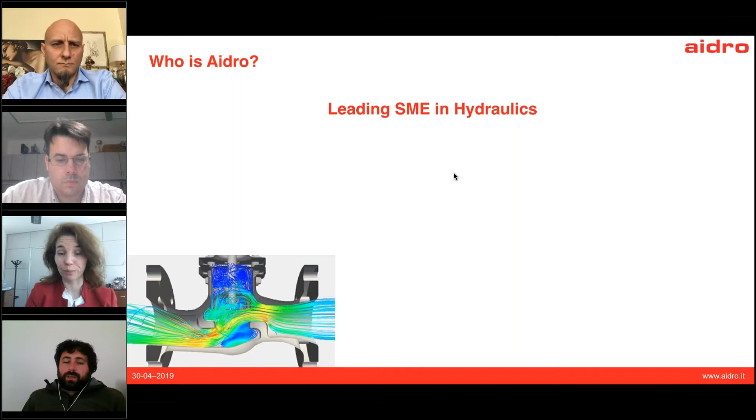Sorry, so again, just a few slides. We are based in Italy. This is our company in the north part of Italy, not far from Milan. And again, who is Aidro? We are a leading company in hydraulics, and hydraulics is the use of fluids under pressure to generate and transmit power. We have more or less 40 years of technical experience, and now we are using additive manufacturing to produce metal parts, using the laser powder bed technology.

A very short overview of our core activities. We do engineering and design for our customers, custom-made solutions, the production and metal 3D printing. We do this in-house with our 3D metal printer. We do the testing and machining of our parts. And because we are a small company, we are well known to be very fast, with fast delivery and quick replies to our customers.

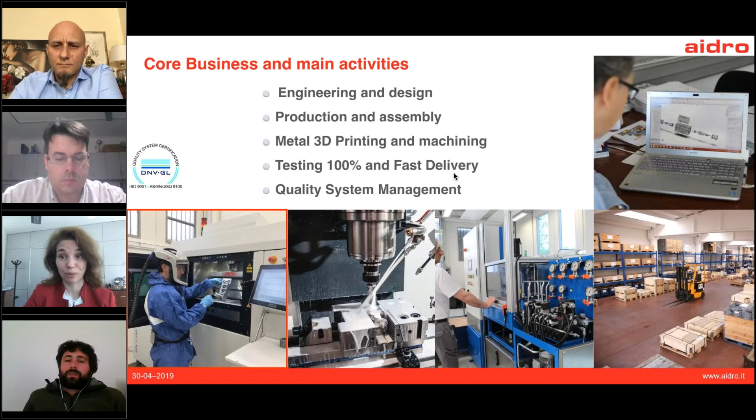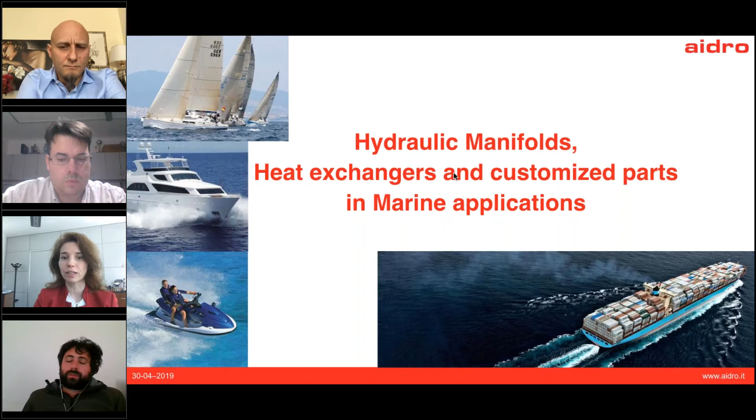Now about hydraulics components in marine and maritime applications. As I told you, hydraulics has very wide applications. For example, in sailing, we have a lot of propellers that can use hydraulic power. In yachts, we have other hydraulics components, and also in jet skis we have, for example, the exhaust manifolds. And in vessels, of course, there is a lot of need for power to move the systems, so we have hydraulic systems inside the vessels.

And now, what about our typical application of additive manufacturing? As I told you, we chose this technology a few years ago because we have very high pressure inside our products, so we need very high density. That's why we decided on metal additive manufacturing, specifically laser powder bed fusion technology. We use different materials depending on the application: stainless steel, titanium, Inconel, or aluminum.

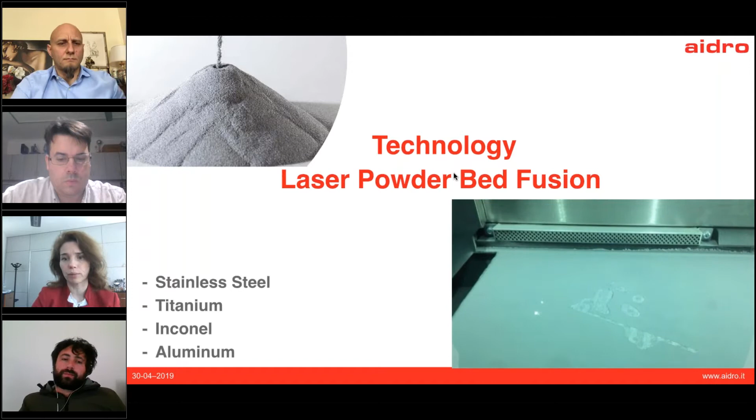But what is really important to say is that additive manufacturing completely changed our minds and our approach to design. We found in additive manufacturing a very high power to solve problems and to have new solutions that were impossible before.

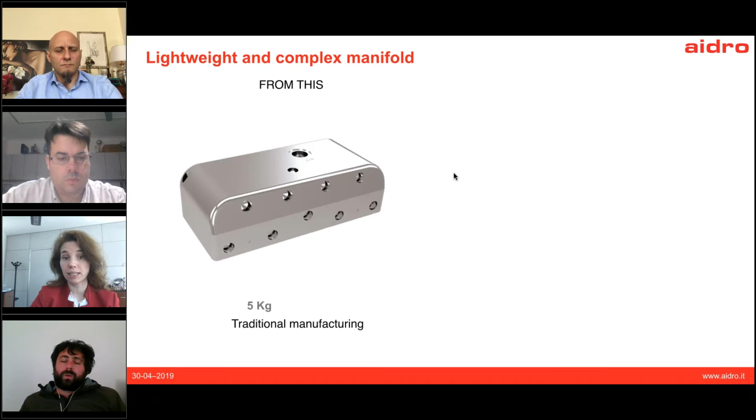Now I want to show you one of our best examples of manifolds. This is a very lightweight and complex manifold. Here is the traditional manifold made from a metal bar, made in aluminum, with a weight of 5 kilos, traditionally made with CNC machining. We redesigned it to have a very light solution and arrived at this manifold that is only 1.3 kilos, so we have a 75% weight reduction. This is really impressive, and it's really important for applications where we need to save weight for lower energy consumption, also for example in sailing or other mobile applications.

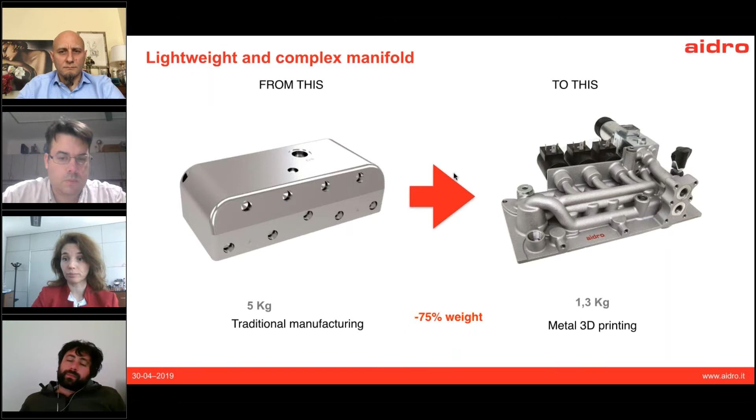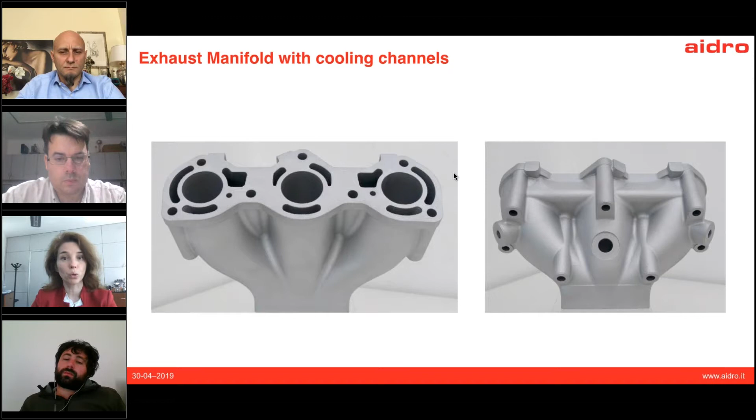This is another example of the advantage of using additive manufacturing in manifolds. This is an exhaust manifold with a cooling channel inside. We have integrated two functions into one, making one unique solution that solves the problem of having cooling inside the manifold.

We have many advantages in additive manufacturing specialized for hydraulics applications. As I told you, we can achieve very complex shapes in a very easy way without higher cost, and our shapes can fit in the available space. We can make custom-made manifolds, for example fitting in the small space inside a boat. We have very light solutions when weight is important, and we can combine multiple parts into one, simplifying the assembly of hydraulic systems and integrating more functions into one. This is the example of the cooling channel inside the manifold.

Of course, this technology is perfect for customized solutions. In many cases where standard production is not suitable, with additive manufacturing we can arrive at the best solution, best product for the application in a very fast way, not only for prototypes but also for spare parts. For the marine and maritime sector, we see a very big interest in spare parts, especially for old vessels, because a lot of spare parts no longer exist. With additive manufacturing, we can reproduce a one-to-one copy of the old parts in a very short lead time.

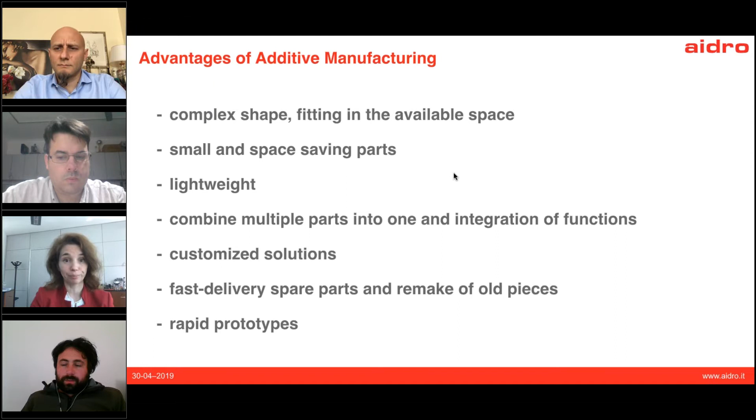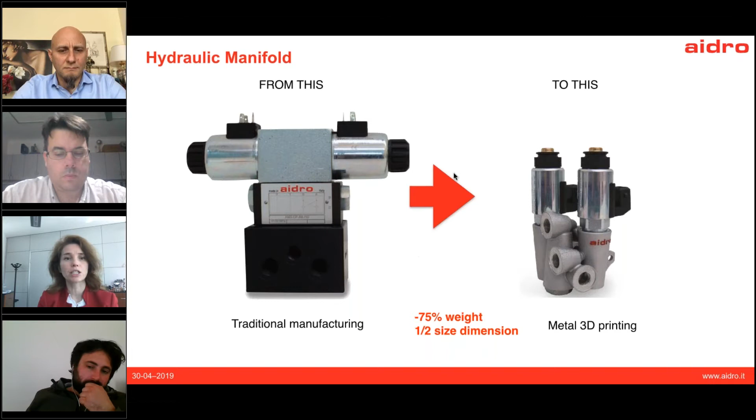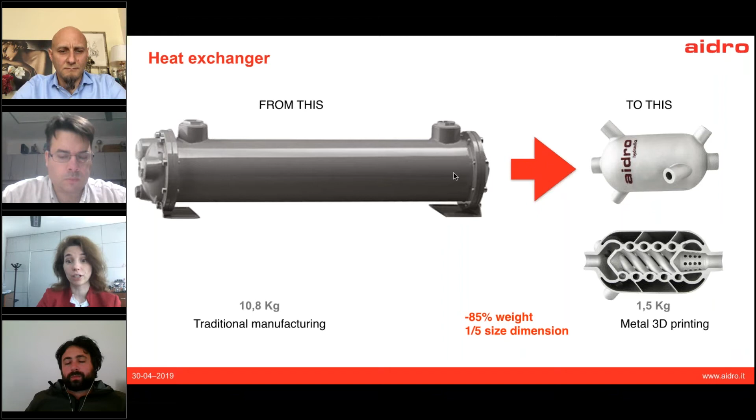Now another example, this is a heat exchanger, special for big vessels that have a lot of heat exchangers, for water, oil, for example. Instead of the traditional one on your left, more or less 11 kilos, we can have the same function in only 1.5 kilos. So it's an 85% weight reduction and a very small size.

How do we do everything? We have our internal department from design to 3D printing, because to develop the best design and the best 3D printed product, we keep our activities inside. The biggest part is the design, because as I told you at the beginning, we have a new approach to design—it's completely free compared to the traditional way. Now we are able to imagine innovative solutions that were not possible before. We use laser powder bed fusion technology, and we have our machines inside.

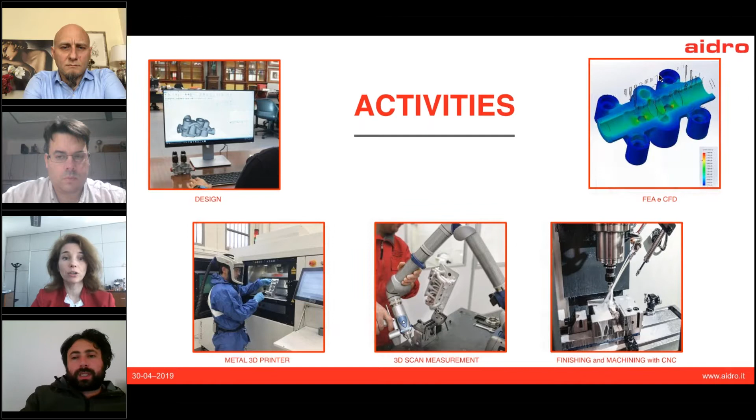And of course, we do all the other activities like machining, controlling the shapes, making measurements, and all the tests, because it's really important to have the process under control, especially for applications like maritime and oil and gas. So we test the powder, the raw material, the printing, and the mechanical properties.

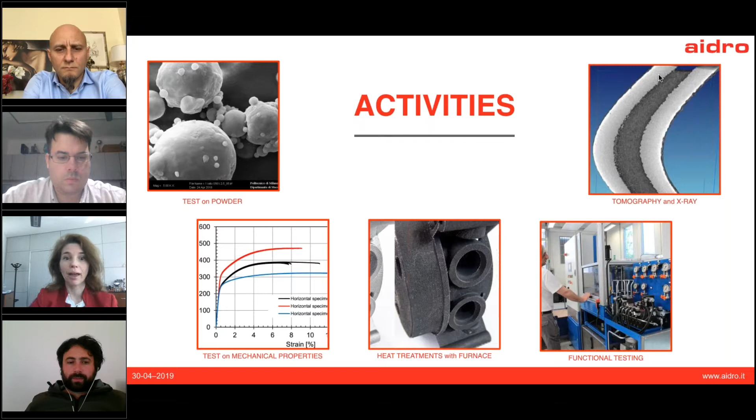And the best part, as I told you, we have a lot of new ideas now to solve situations that seemed impossible before. We now have open-minded people on our team who can come up with new ideas. We are more flexible, have a lot of creativity, and are able to face new challenges. Thanks to additive manufacturing, we can now see possible solutions to a lot of different situations. So thank you very much for your attention, and I'm here ready to answer your questions.

Thank you very much for that, Valeria. Really fantastic, I really had no idea it was that significant a weight reduction on some parts. So with Valeria, we discussed how small intricate parts for large systems can really affect large systems.

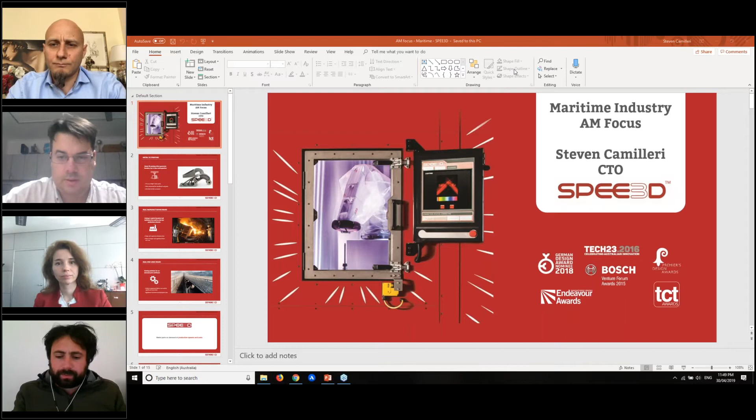Great, thank you. Can you hear me okay? I can hear you fine, yes. And now I'm going to turn the controls over, so you are now the presenter and you should be able to share your screen. Okay, just a second. All right, is it working? Yeah, yes, it is, yes.

Great, all right, well, hi everyone. Thanks for coming to have a listen to our presentation. So, as David mentioned, I'm the CTO of SPEE3D. We're an Australian startup company working in a new kind of metal printing technology.

So a bit of background. Everyone knows technologies like SLM, fantastic ability to make parts, incredible geometric freedom, but you have to pay the penalty in terms of cost and time. So these kinds of parts tend to focus on very high value parts. So we've come into the industry trying to change this paradigm and get away from your traditional medical, dental, aerospace focus.

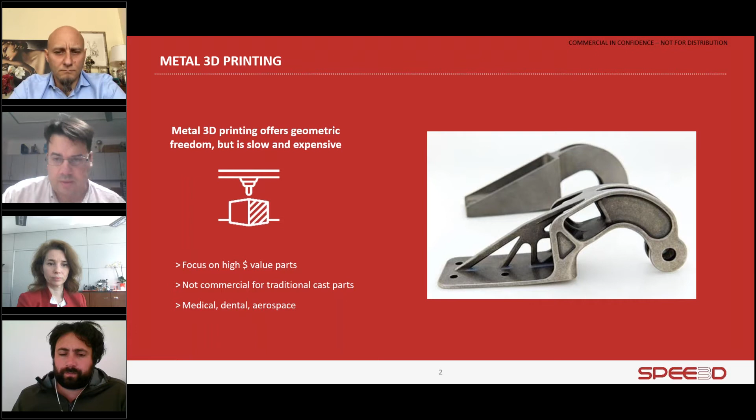So the kind of industry we want to compete in is the casting industry. Casting is the way that you make metal parts cheaply. It's been around for about 5,000 years. It takes a lot of infrastructure, equipment and tooling to make casting work. You typically need to do casting in large batches, it's not cost effective in small batches, and it's very difficult to manage that process. So we want to try to make the same kind of parts that casting can make, rather than the same kind of parts that SLM can make.

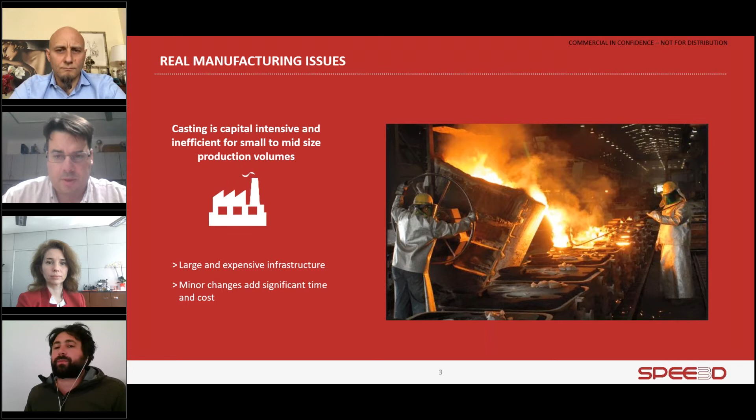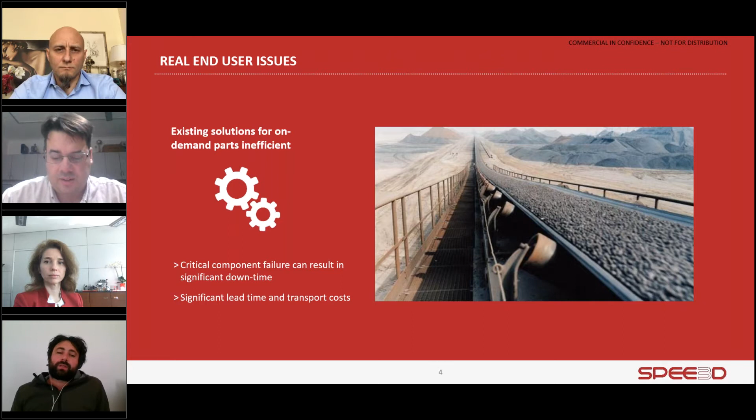So we're targeting real end users, the idea that people might be able to avoid downtime using 3D printing technology, either printed on site or very close by. We're currently involved in a range of very interesting remote projects where we're looking at printing parts on demand. The picture here you can see is an iron ore mine in Australia. That conveyor belt goes for 300 kilometers, so you can imagine it doesn't take much for that to go bad, and it's quite difficult to get it to go well again.

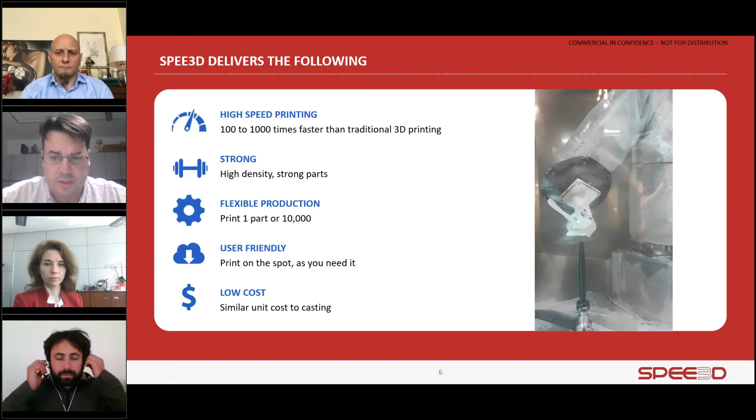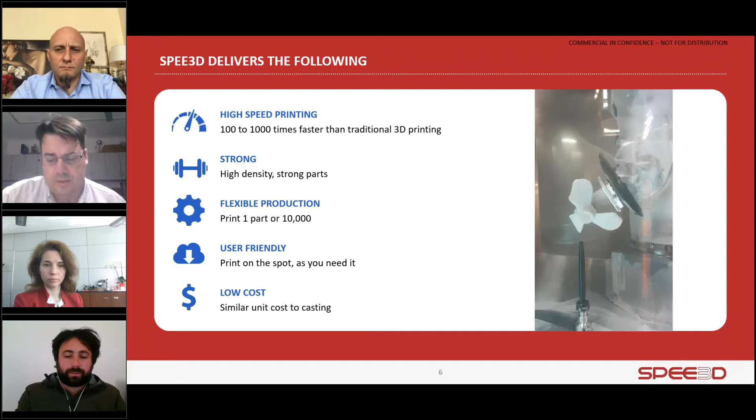So we're here to make metal parts on demand at production speed and cost. That's our vision. So I have a little video here of our process, you can see it manufacturing a propeller on the right, this is real time. Compared to SLM, our printing process is about 100 to 1,000 times faster. We make very good quality, high density metal. We put a lot of work into our materials development, and that's really what we're delivering, good material. And the process is quite cheap, quite flexible in a range of volumes. It allows you to print on demand, it's very easy to access, and it's very low cost.

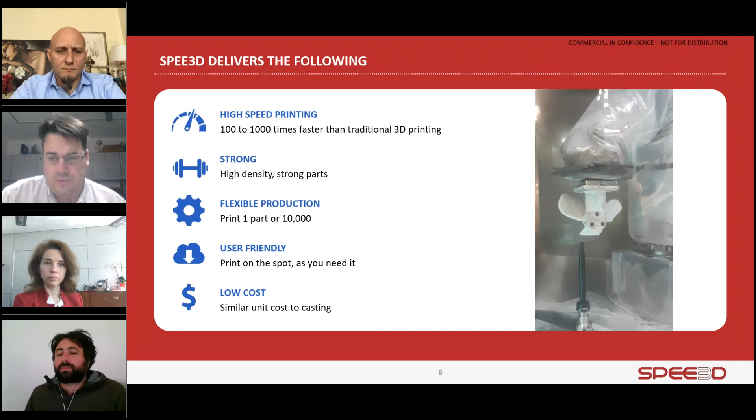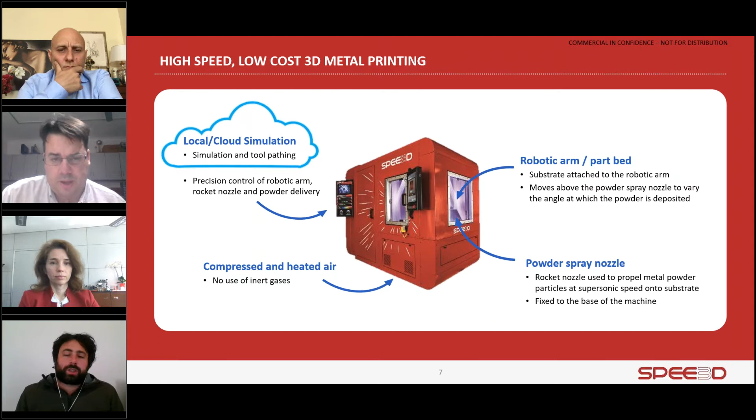This is our LightSPEE3D machine. You can see a robot arm which holds the part as it's built, with a spray nozzle pointing upward that the robot arm hovers over. You bring in your geometry through our cloud process into the machine and load the powder. The process uses a cold spray of compressed air at about 1 kilometer a second to smash the metal powder into the part and build it up, all done without melting.

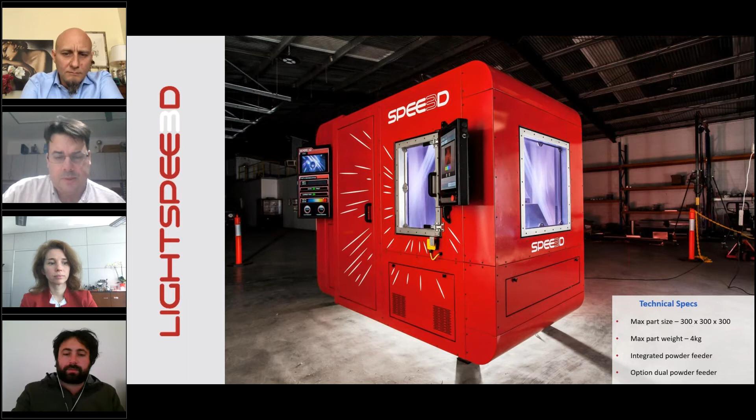This is our Lightspeed machine, our small machine, which does parts up to about 4 kilograms. And this is our newly launched product, Warp Speed, which will do parts up to 40 kilograms. This is starting to be a normal kind of size for the maritime industry.

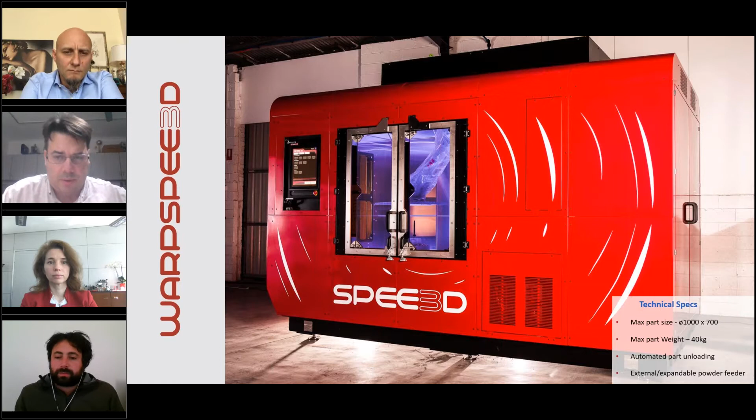There's a range of interesting materials we can do. Copper and aluminium are our traditional materials, and we do very well with those. Pure copper is our electrical and thermal material that has very high performance in that market segment. Aluminium 6061 is our favorite alloy, used for mechanical problems - whenever there's a need for light parts that are very strong, aluminium is perfect. 6061 is a particularly good alloy for marine use, as it's very corrosion resistant.

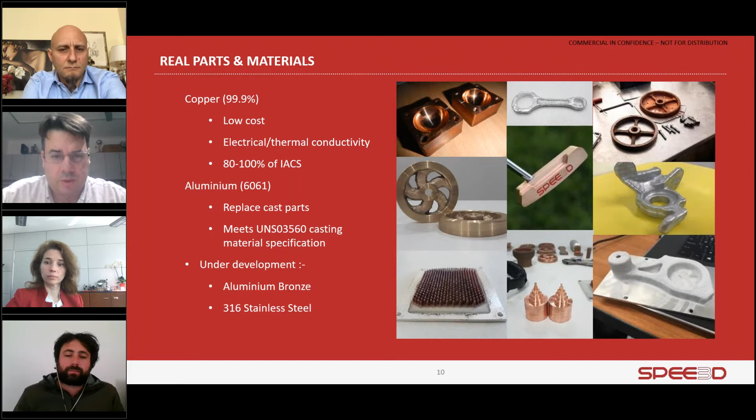Now we have two other materials we've been developing for some time, getting close to being complete: aluminium bronze and 316 stainless steel. The wheel you can see in the center of the screen is done in aluminium bronze, that lovely gold color.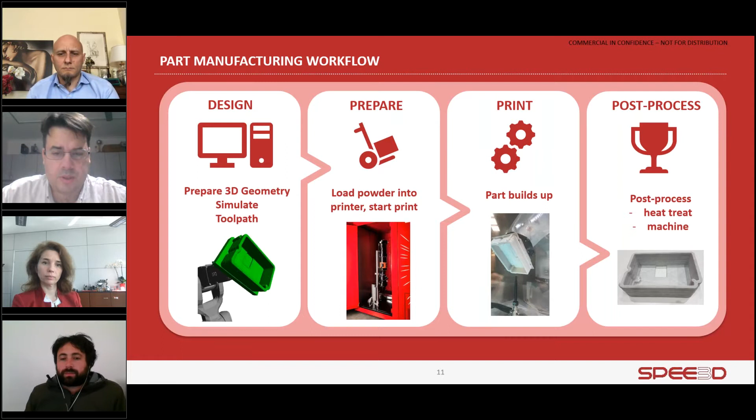We worked with Charles Darwin University here in Darwin, Australia on this project. It was a collaborative venture and went extremely well. For the proposed solution, firstly, we wanted to establish a compliance framework.

This is something that's starting to become very common in 3D printing - the idea that you need to find out how to make that part acceptable to use once you've completed it. You can't just print it and prove that it's good; you've got to generate the necessary paperwork to make sure that part's acceptable to use in the real world. In this case, there's a military standard those parts are made to, and that made it very clear what we had to do to make that part comply.

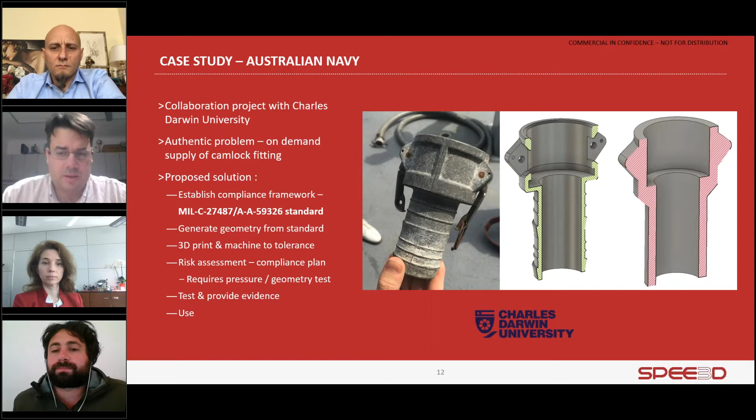On the right you can see two examples of the part generated from the standard. On the left, with the yellow-green cross-section, is the part as it's completed and machined. On the right, the red part is the 3D printed blank, something like a cast blank with machining allowances, giving us the ability to machine it to precise tolerance.

So one of the advantages of our process is it's quite predictable, and this means we don't need to do so much trial and error as might happen with other 3D printing technologies.

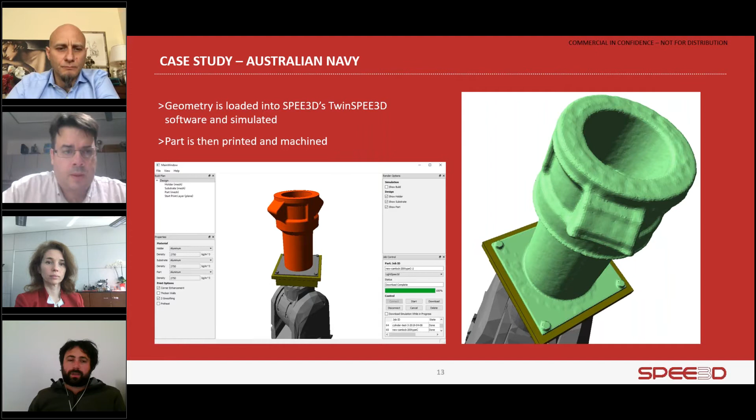So the printing cost we estimate to be about $100 if you were to just print one — that's a case where the printer is lightly utilized. However, if you're able to utilize it more regularly with a series production style arrangement, then typically you're making parts like that, about a 300 gram part, for about $20 US.

The estimated printing time is about an hour for the one-off. That's in a mode where the printer guarantees what it will do. But for production, where you're allowed to cut some corners and optimize some things, you can get that down to 10 minutes. So it's a very rapid way to solve the problem.

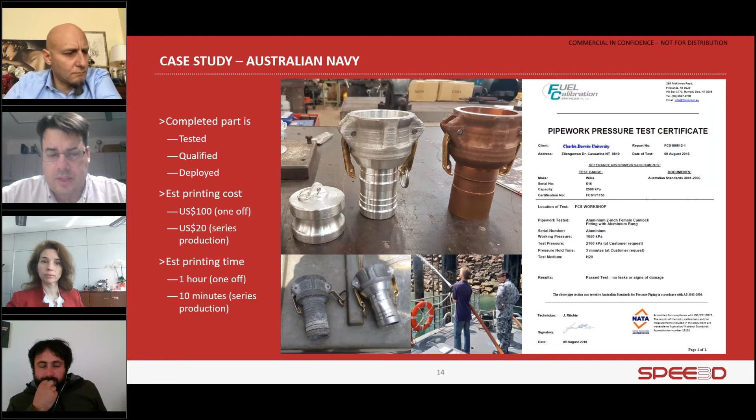Thank you very much for that, Steve. That was definitely very interesting and totally, very much separate from what we discussed with Valeria. So we talked with you and Valeria about two different metal technologies.

Let me just do that. Yeah. Okay, so you are the presenter now. So we see your screen, so you can share your presentation whenever. Wait a minute, you can see my screen just now? Yes, I see. Okay, a minute to put full screen.

Hi to all, thank you for listening to me. I'm Francesco Belvisi, and to me it was also very interesting listening about metal 3D printing, but our focus is on plastic parts. We are a small company, a startup from Italy, from South Italy, and we use also robotics, and we print parts with carbon fiber filled plastic, usually polyamide.

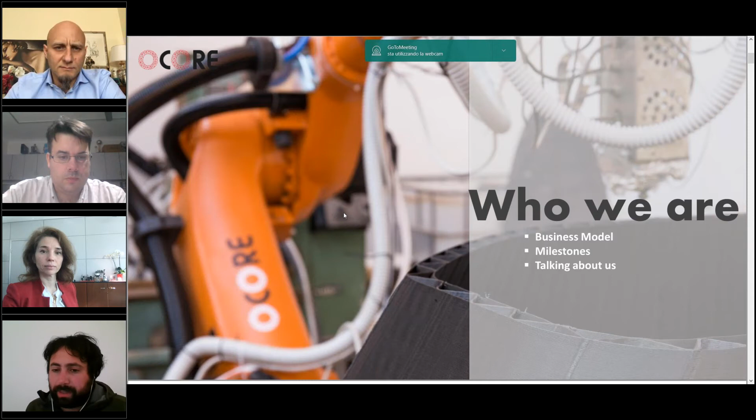Just to give you a general scenario of our company: we have lots of technical partnerships, working with companies for developing hardware and software, a material company, and a certification and testing company. We provide service for printing semi-finished products for our clients in manufacturing companies, shipyards, or companies that work in the field of composites.

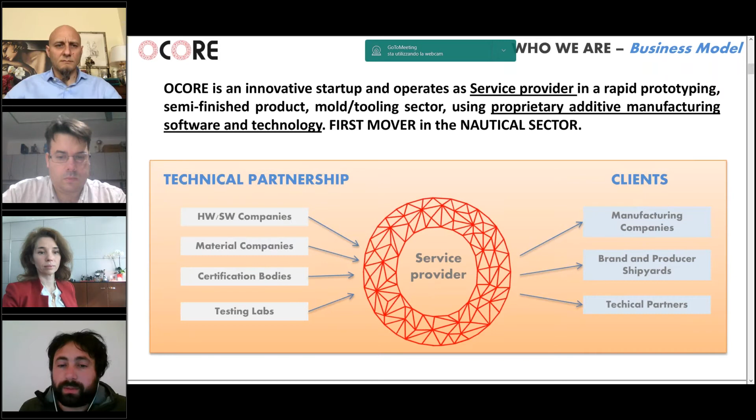Just to tell you a very short story about us: we started with research on complex and optimized structures for sandwich core geometry. We had an initial partnership with CRP Group, a company expert in SLS technology with a very stiff polyamide carbon reinforced solution. We did many tests coupling this material with conventional continuous long fiber composite and textile. In the second period, we decided to start developing some components for boats.

With time we approached making bigger parts, so we did some tests with BAAM company.

Sorry, I heard some echo. I'm sorry, I can hear you fine, but maybe I should mute my microphone. Yeah, exactly, thank you, let me just do that.

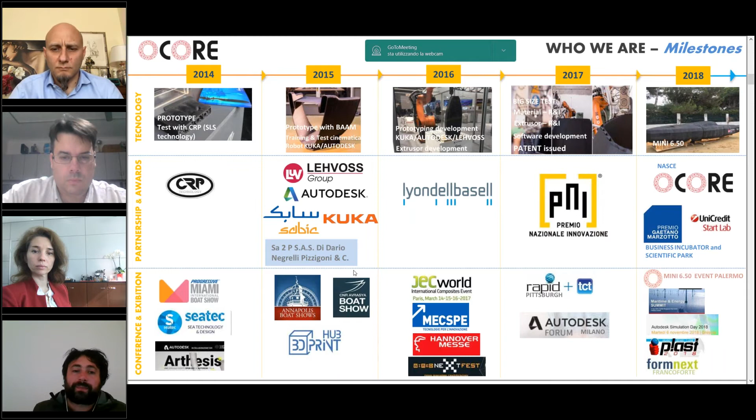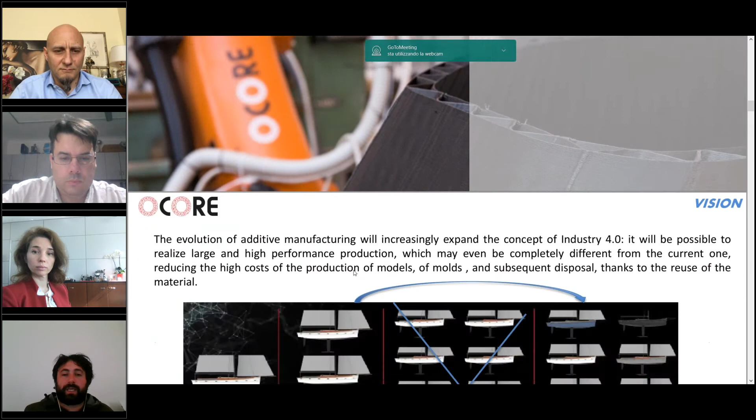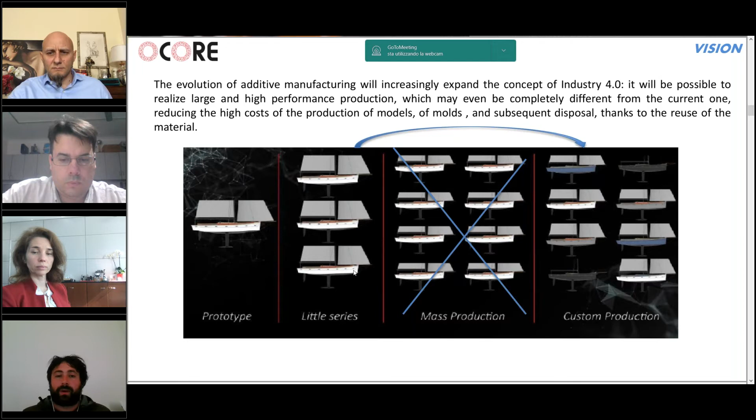So lots of companies talk about this solution, but what about our vision and mission? We started from our background as yacht designers and builders, and this is a field that doesn't have lots of automation in production. It's generally very expensive, making prototypes and custom-made units. So in our approach, this instrument has great potential, also from an ecological point of view.

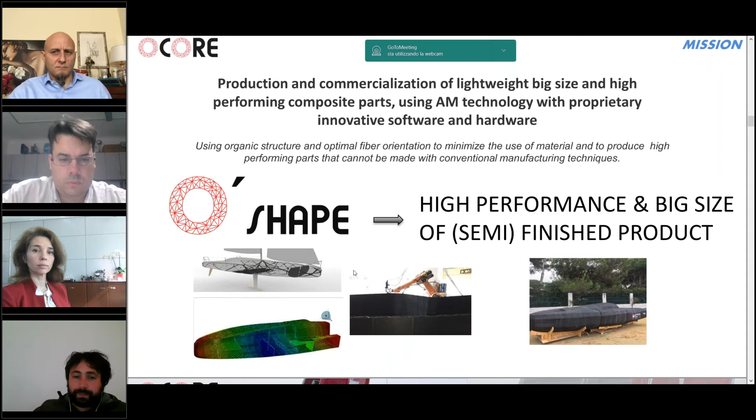For the first time, we are using thermoplastic material that can be reused on medium or big size units. Another element of our approach is that we can manage new kinds of shapes optimized by topological optimization. Usually you cannot use this kind of structure and structural layout in big size components, because they are very complex to produce with conventional production systems.

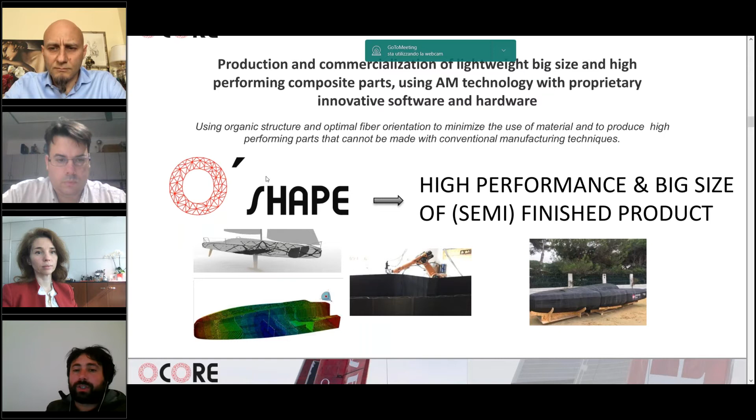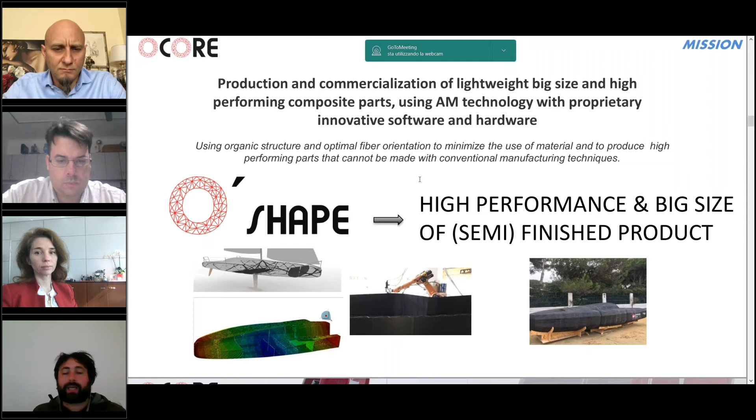So one product of our solution is called O-Shape, our approach to manufacturing the hull, and the other kind of product we call O-Molds, which is the way we can also produce some molds for parts of the boat.

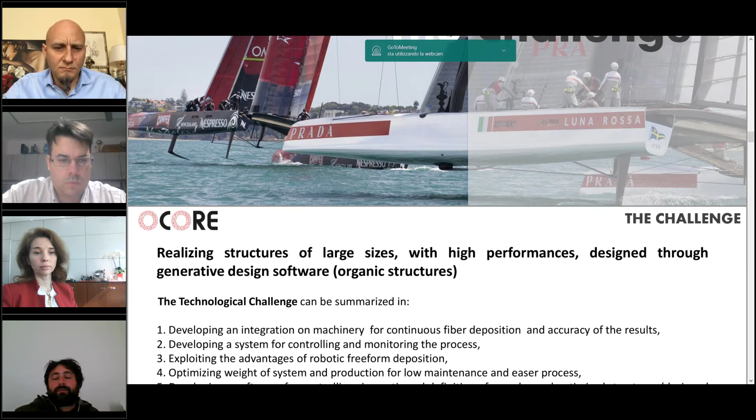Regarding the technical challenges of our system, we are always in a developing process. In our future approach we will integrate continuous fiber placement, because currently we only print composite with short fiber, and we do a second step with composite lamination over the 3D printed structure.

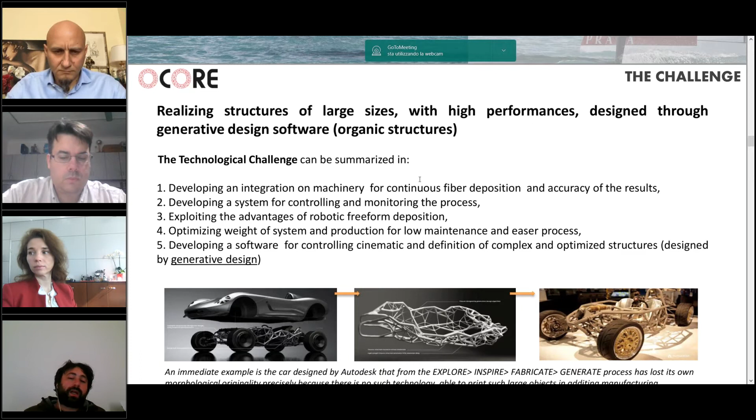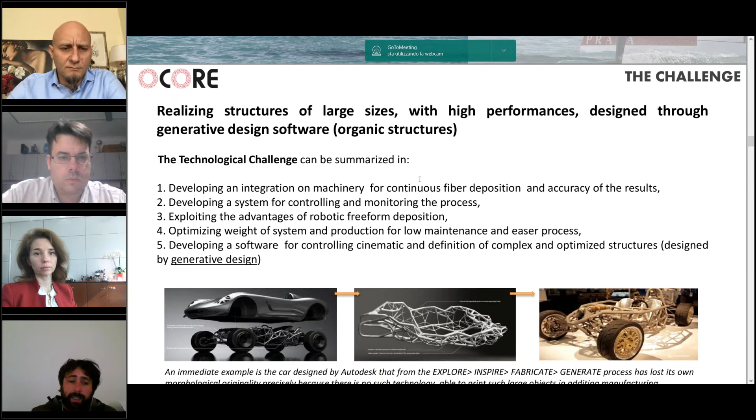We are always pushing and developing the freedom of printing, because we don't print only in longitudinal and parallel layers, but with our 3D printing system we control the anisotropy of the printer, so we can print following the preferential direction of the load. We've also always worked from the design point of view to integrate multiple functions and elements inside the designed part.

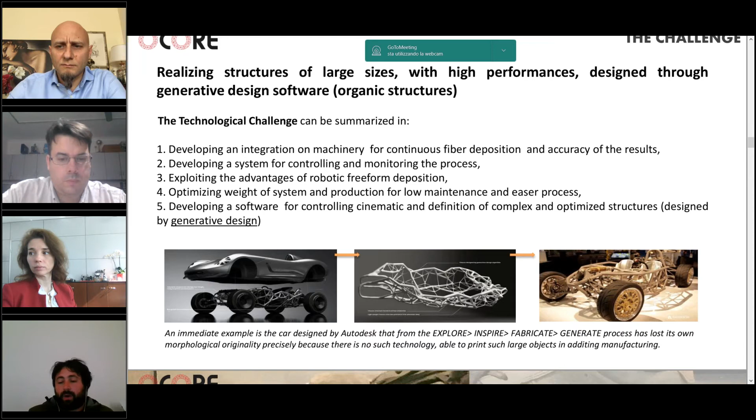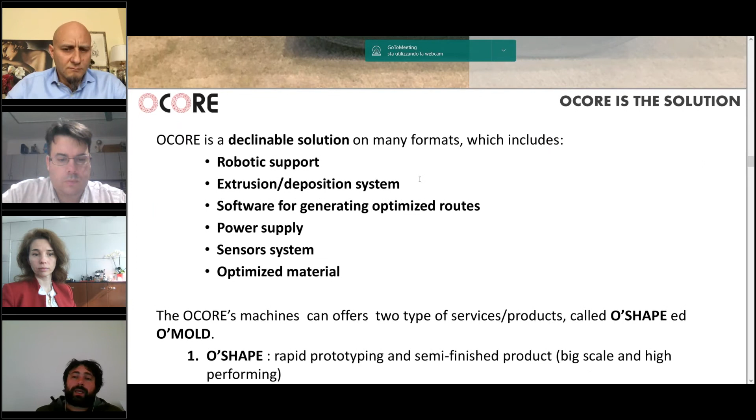Regarding our solution, just to help you understand better: we have a robotic support and an extrusion system that has lots of control and integration to manage the process.

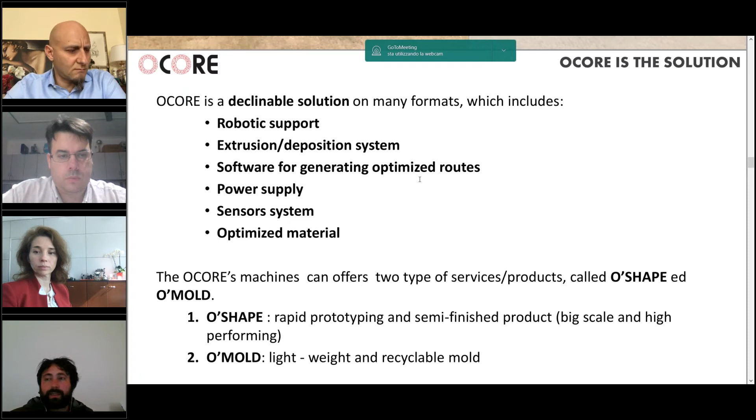We worked so much on the software to have exact calibration and control of the dimension and speed of the robot, so we directly control the robotic system. One very important part is monitoring the process, because it's crucial for controlling too high or too low temperature levels that can melt the part or cause poor adhesion between layers. We also have a range of materials for different solutions and applications.

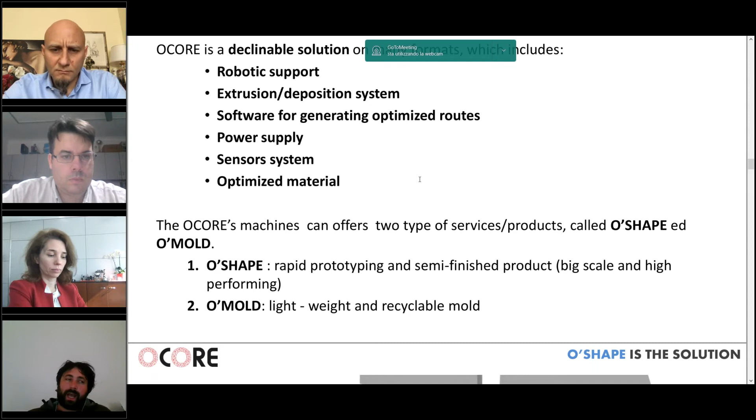In the case of the boat, we developed together with Lehvoss a kind of plastic that is very stiff and resistant to marine environments, and we did a lot of tests for aging and water absorption.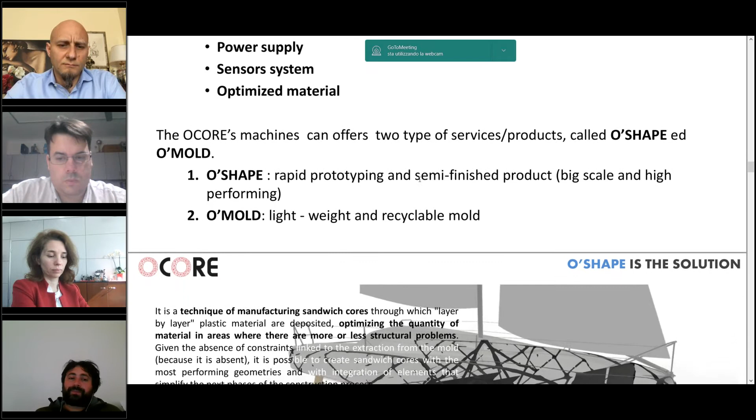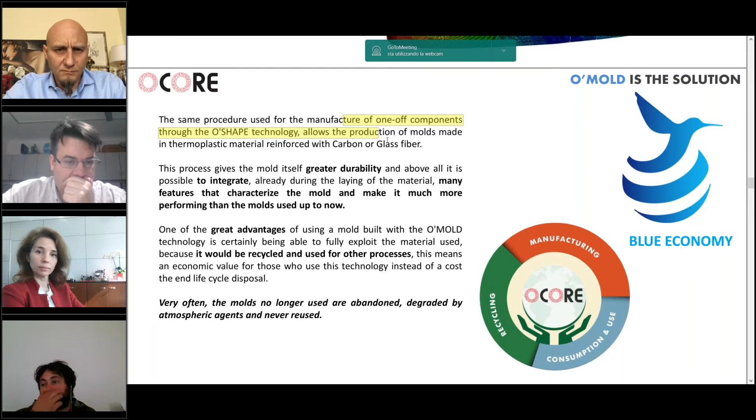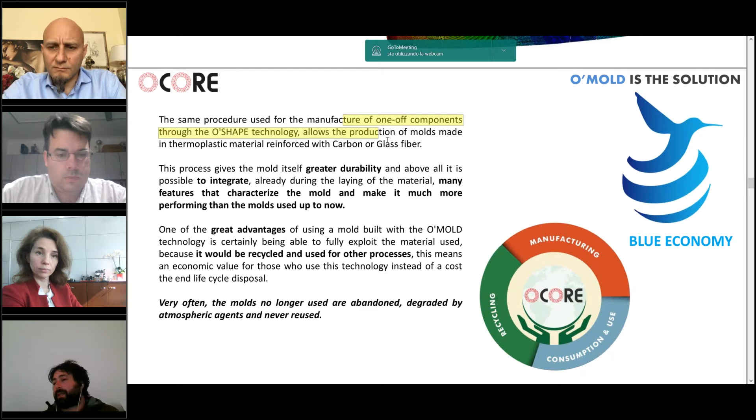What's going on, as I was told before, with our solution is something very new in the marine field: the opportunity to make molds that are in thermoplastic. We believe there will be a shift in the nautical sector from thermoset resin matrix to thermoplastic, because there are problems related to the reuse and disposal of boat molds at end of life cycle. With our solution, there is not only the possibility to recycle, but also to imagine closed process systems in which the company can reuse the same material for making other stuff in a second stage.

In our approach, many areas work together in the generation of our system. From the design point of view, we did lots of optimization with no structural constraint. In the phase of drawing and designing the element, the microstructure of the corrugated element, we can optimize the deposition phases and the structure, the density of the lattice structure.

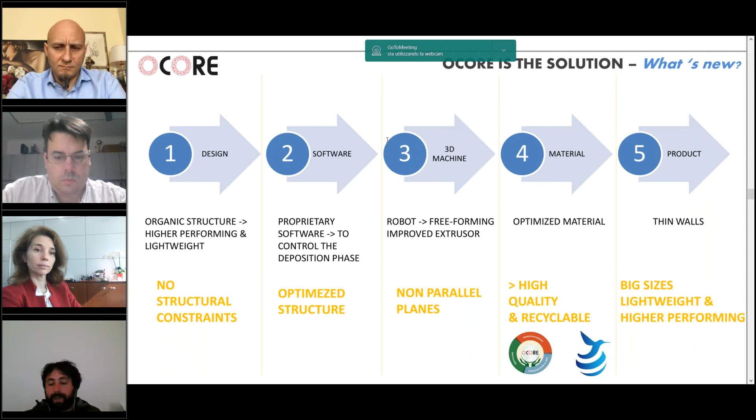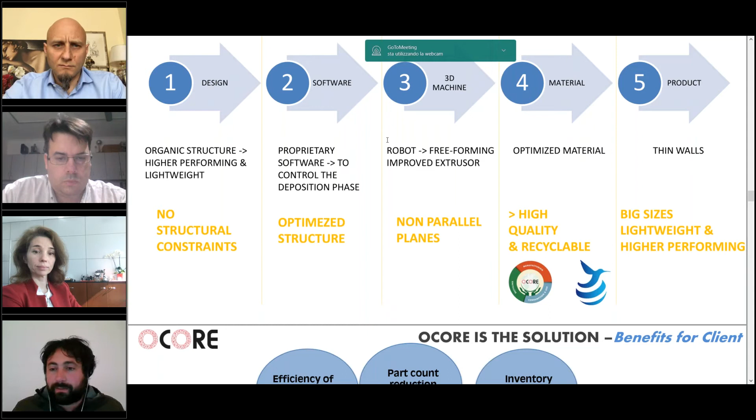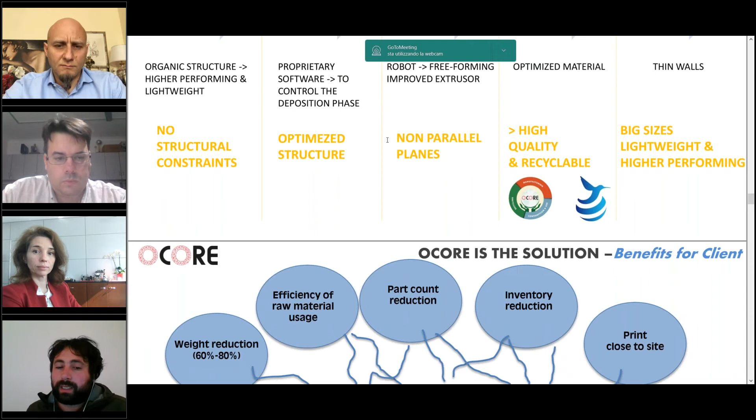From the stuff that is very special, the final result is that we can have very thin layers on big structures. So for client benefits, starting from this element we can have in many applications a weight reduction, enhanced customization, and integration of complex geometry.

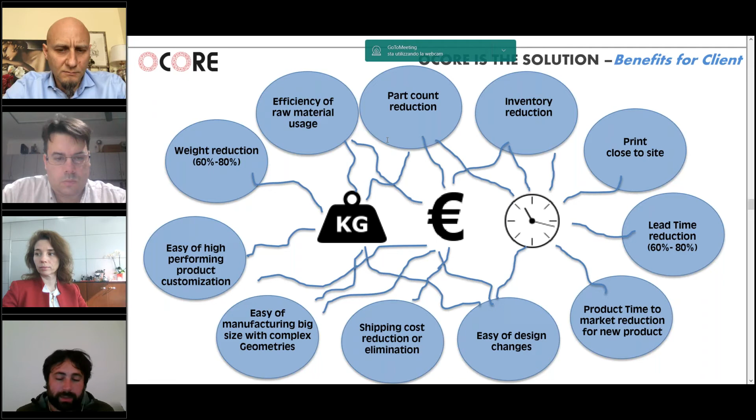Let's think about when you make a composite part in the marine industry, in boating: we can organize, since the design stage, the space for wiring, for cables, for special components to be inserted into the composite part.

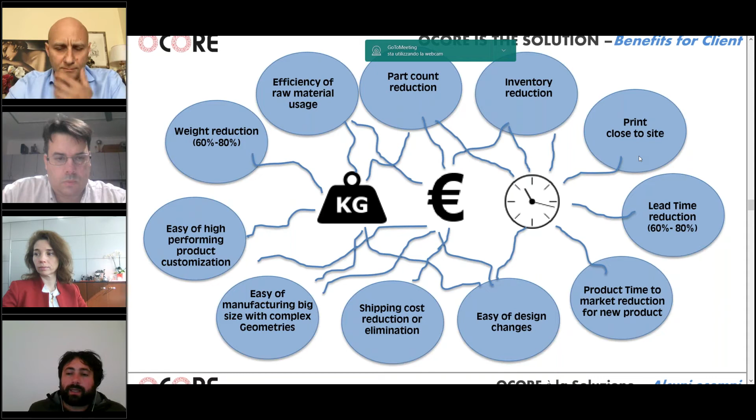Also, from the time of production, we can really reduce the time compared to conventional production systems, and it should be very fast in the near future, making a new product with less pollution and less time.

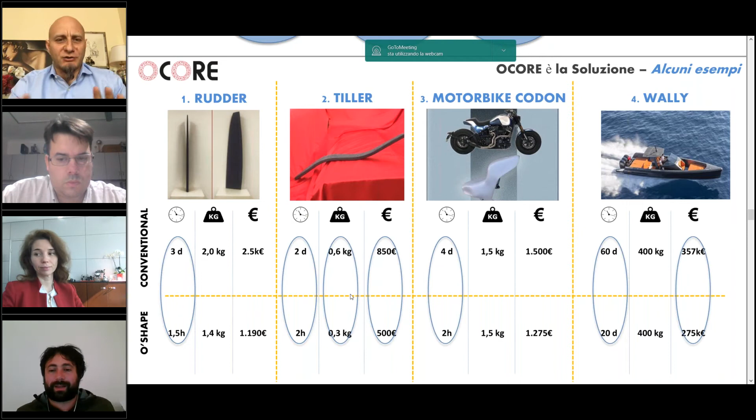But okay, I'll keep it short.

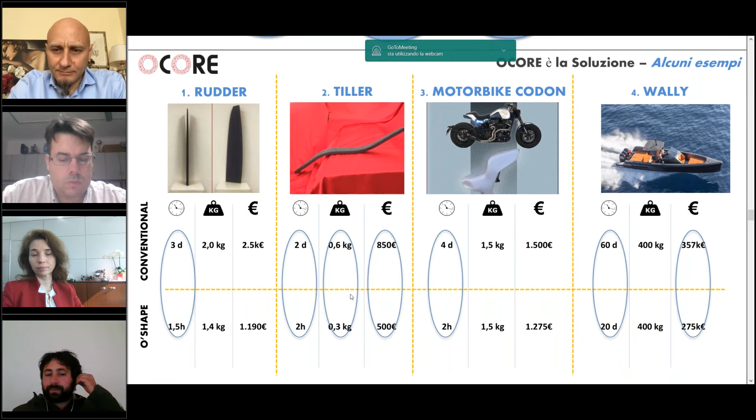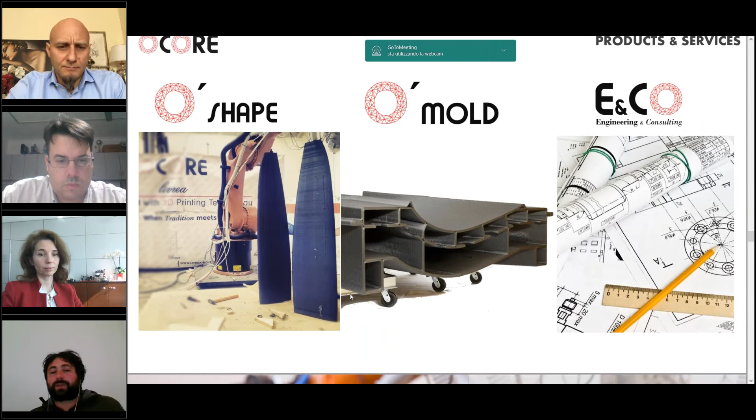These are the kinds of services we do: shape, mold, and engineering consulting.

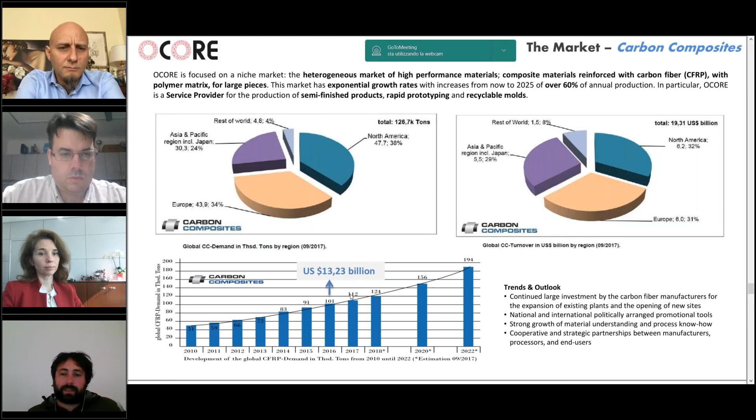I'll run fast about the market, where we did lots of estimates. There is a big potential for market in the composite industry for 3D printing, and I'll just run fast on this area.

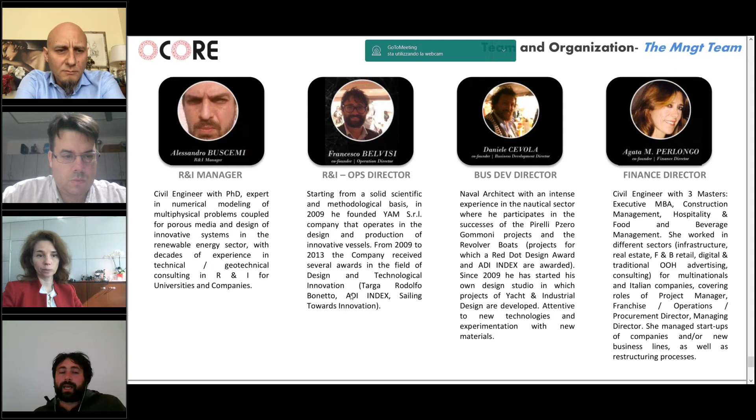I would say, just to present our team: we are a team with me as R&I and operations director, with another colleague as R&I manager. We also have a business development director and a finance director, and this ends the slide.